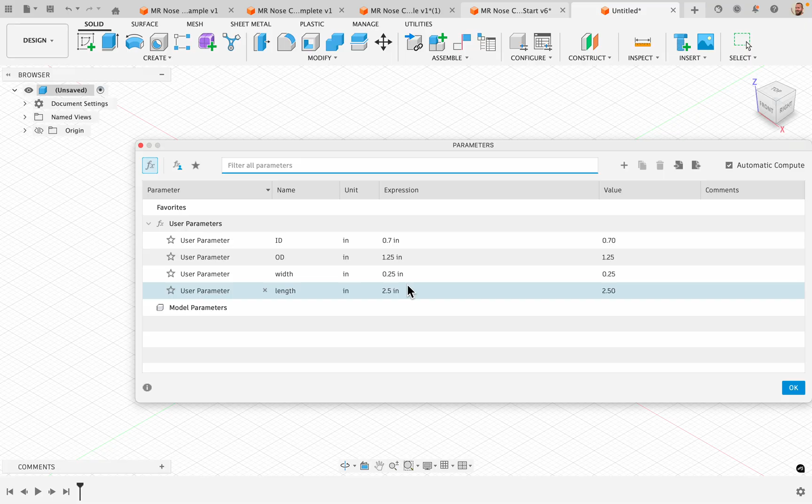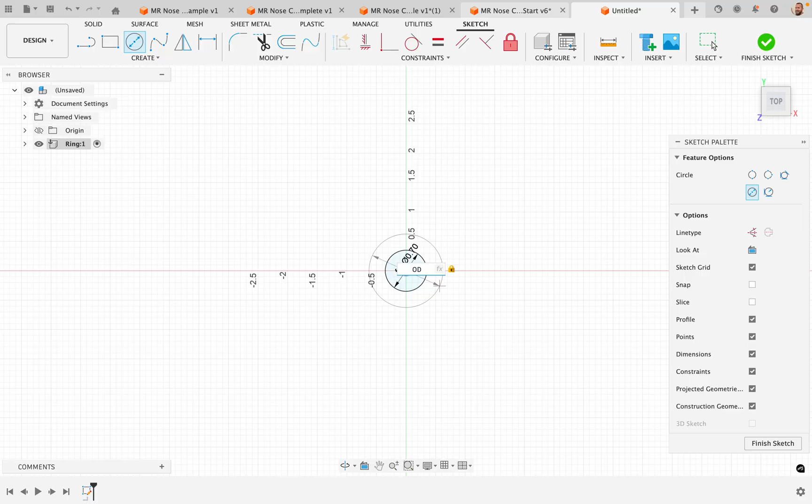Okay, so let's get started. We're going to create a new component, and I'm just going to call this ring. And I'm going to make a sketch on the XY plane. I'm going to make one circle, and this is going to have a diameter of ID for inside diameter. And then I'm going to make another circle, which has a diameter of OD. And I like to drag these out so that it cleans up my sketch a little bit.

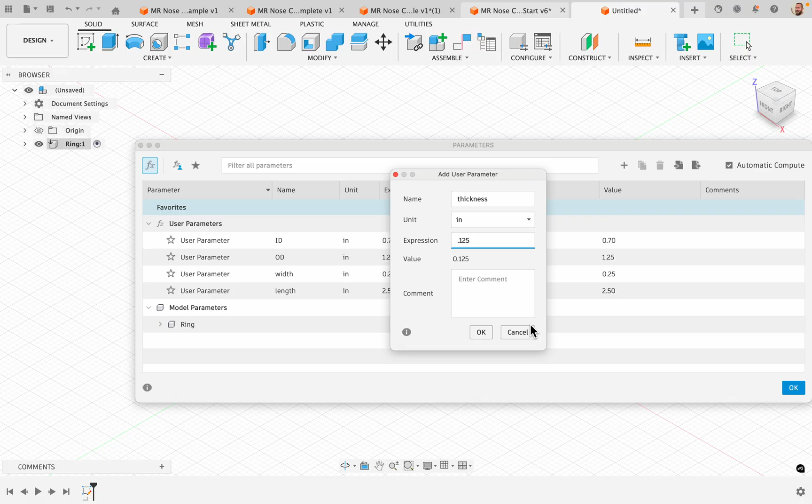Finish. Okay, one thing I forgot, I'm going to add another parameter. That's going to be thickness, and that's going to be 1/8 of an inch because that's the plywood that we're using. So I'm going to add thickness, and I'm going to extrude this to be thickness. All right, great. Now I want to add some little notches in here so that I can put my spacers in there.

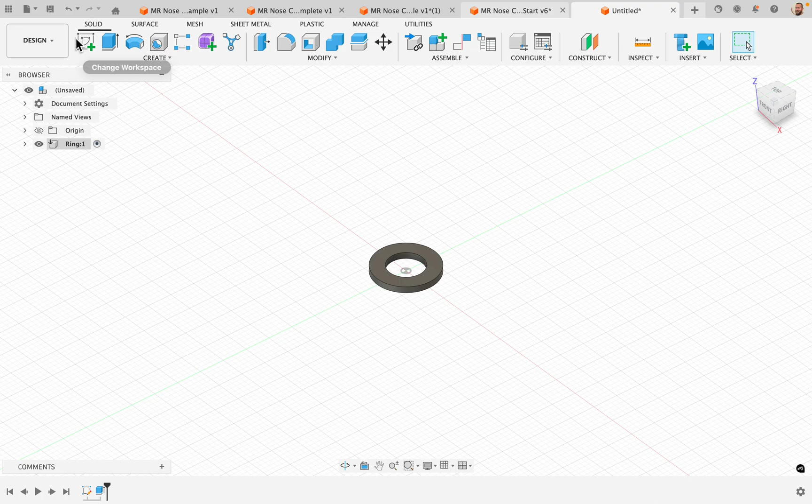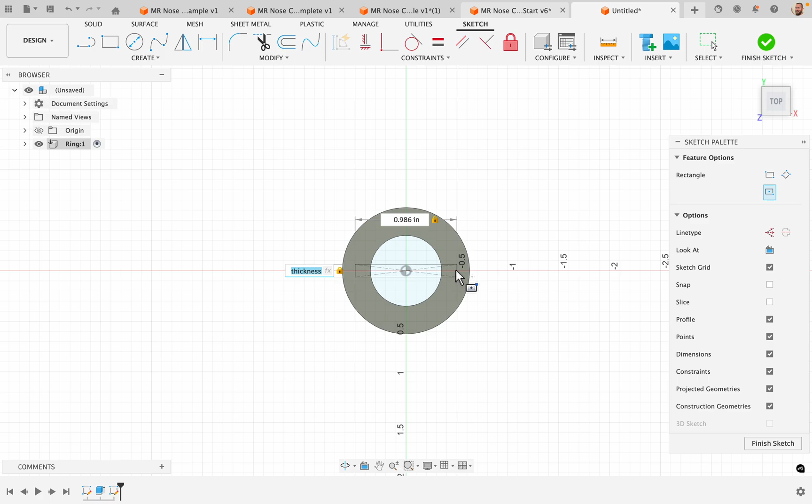And what I'm going to do is make a new sketch. I'm going to click, and I'm going to make a center rectangle. And I'm going to make this thickness. And I'm going to make this, I'm just going to make it this value for now. Let me check that value. I'm going to dimension it here. And this will be

OD minus ID. And I'm going to divide this number by 2, so I'm going to put this around with parentheses. I'm just moving by pressing the arrow key. And now what I need to do is say plus ID, and I'm going to hit enter. And that's good. So this is now in the midpoint between the inside diameter and the outside diameter. All right, so I like this.

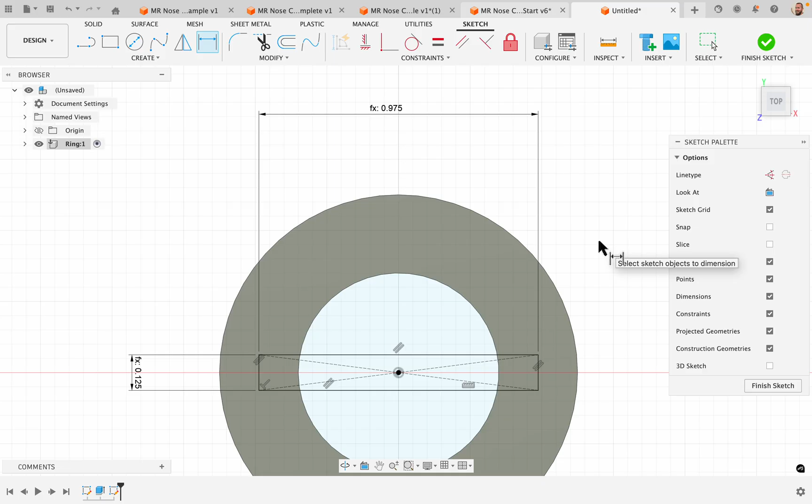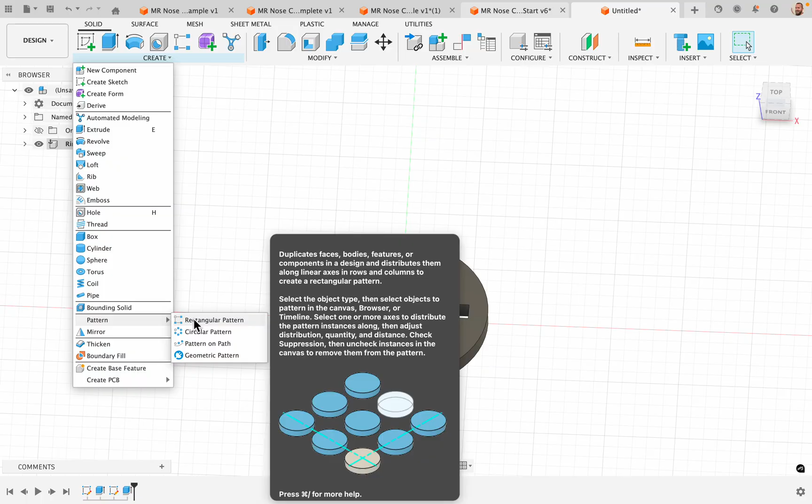And now I think just having three spacers is enough. So I'm only going to extrude one side right here and say okay. And I'm now going to create a circular pattern. I'm just going to click on this feature right here. I'm going to hit components, and I'm going to click here. It's not doing what I want it to do. Let me unselect that. Sorry, I'm going to select features. That's what I want. Features, because I just want to select this extrude. There we go. So features, not component.

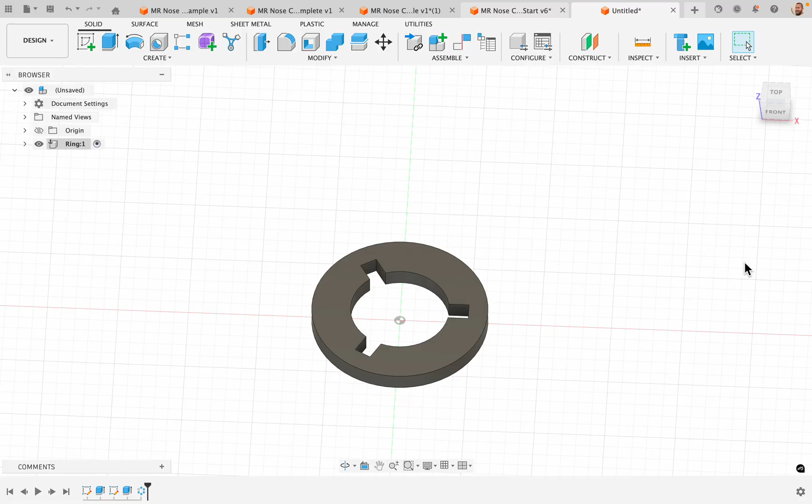Now I'm going to click on my axis. I'm just going to click on this ring, and it's going to set it to 3 as the default. And so I'm going to say OK. All right, so that's going to be one of my rings. And now I'm going to make a copy of this ring. Actually, it's a good time to save. I'm going to save this as motor mount. All right.

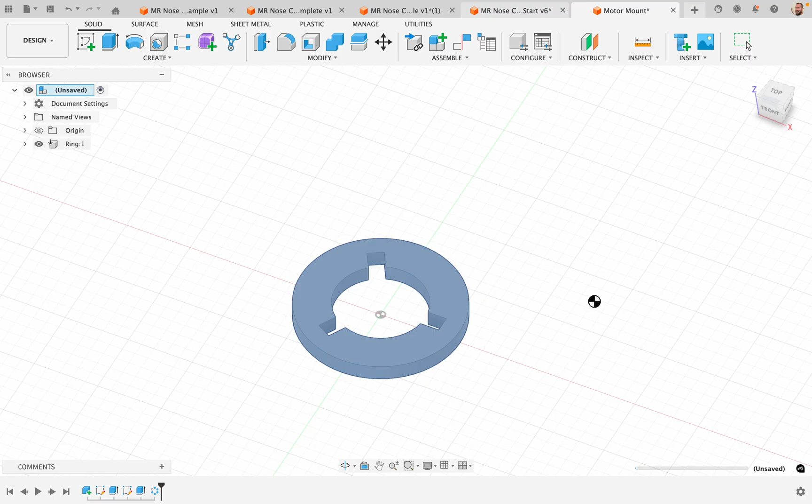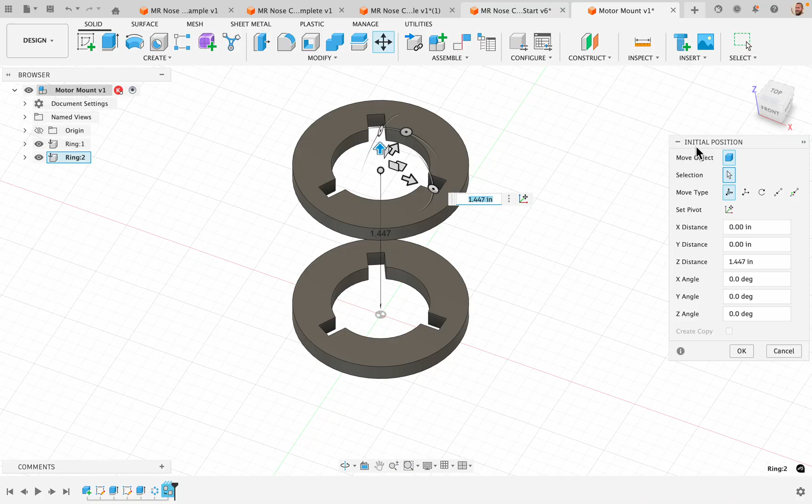And we'll make a copy of this. I'm going to right click, copy, and I do want to keep this as a paste, not paste new, because if I make any changes, I want them to be identical. So I'm going to hit paste, and now I have my second ring, and I'm just going to bring this up as length, right? That 2.5 inches that I have. Beautiful.

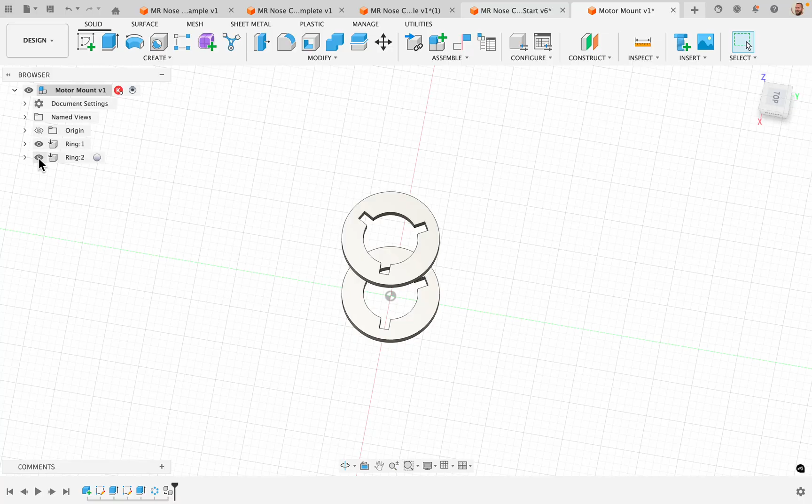Okay, so now we are going to work right here. I might hide this one, and I'm going to make a new component. No, I clicked the wrong thing. I'm going to click new component, and it's going to be called spacer.

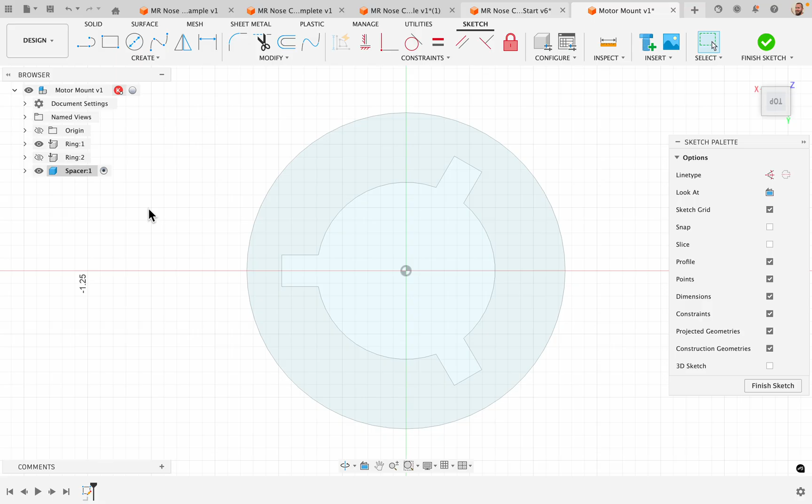Okay, and I will make a sketch on here. I'm going to use this one because it's nice and square with my x-axis. I'm going to project this and say OK. I will make a center point rectangle, and I'm going to start that just from right here.

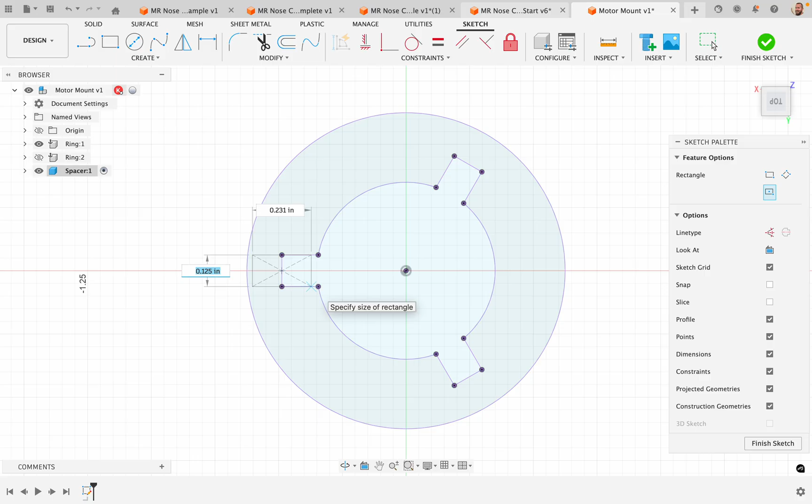All right, so I'm going to try to make this, I do want to make it that thickness on this dimension. And this one, I'm going to go OD minus ID. And I think I need to divide it by 2. So I'm going to put a parenthesis there, and I'm just moving with the arrow key and divide it by 2. So that looks pretty good. All right.

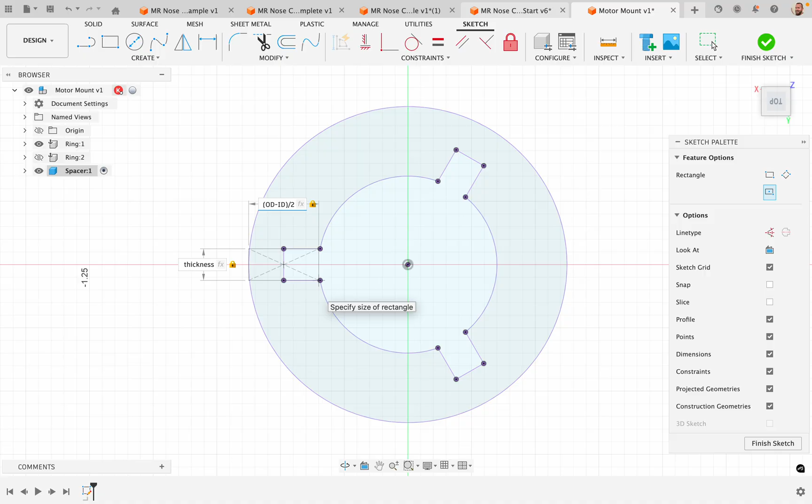I'm going to zoom in and make sure that I like this. Okay, I don't like it because see how that line, the rectangle goes outside of that curve? That's no good. So I'm just going to minus 0.05, and that was too much, so 0.01. That looks good. I like this. Okay, we're going to go with this. So I'm going to finish this sketch.

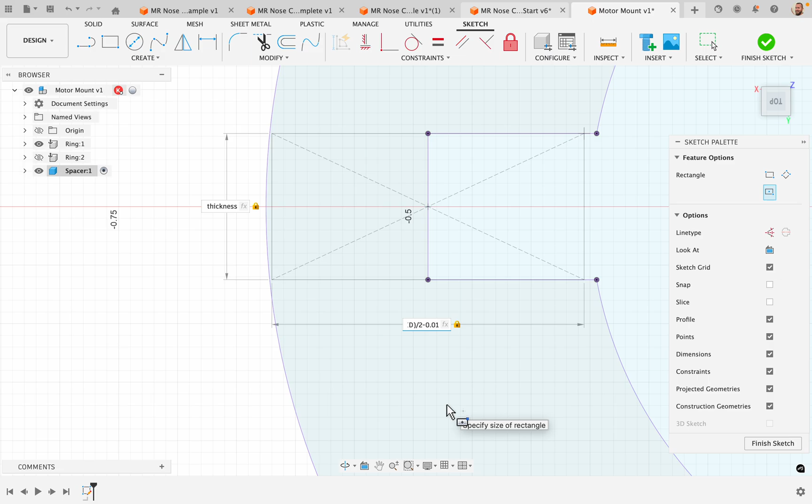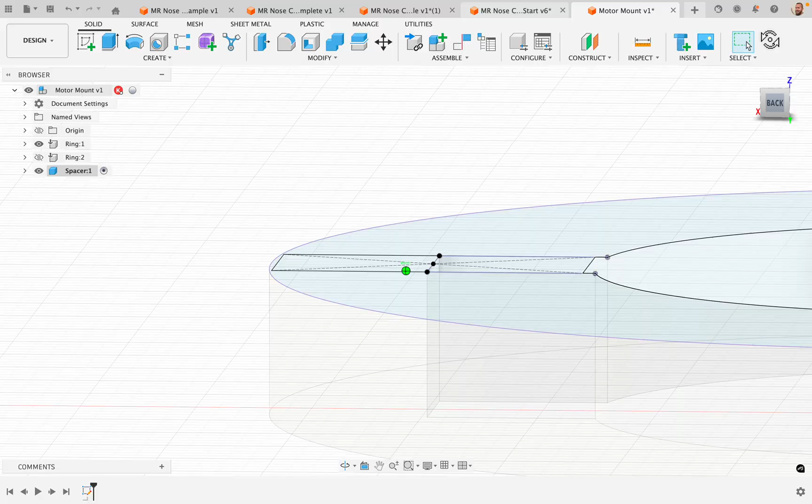Actually, I want to add one more thing. So I'm going to edit this sketch. No. And I'm going to make a line between here and here. And I'm going to use that for extruding. Okay. So now I'm going to extrude this part down. And I'm going to extrude it down just a negative thickness. I'm going to say okay.

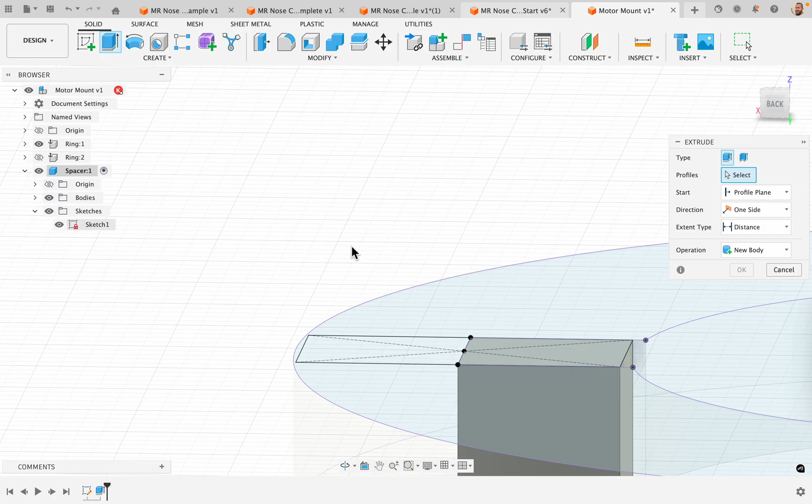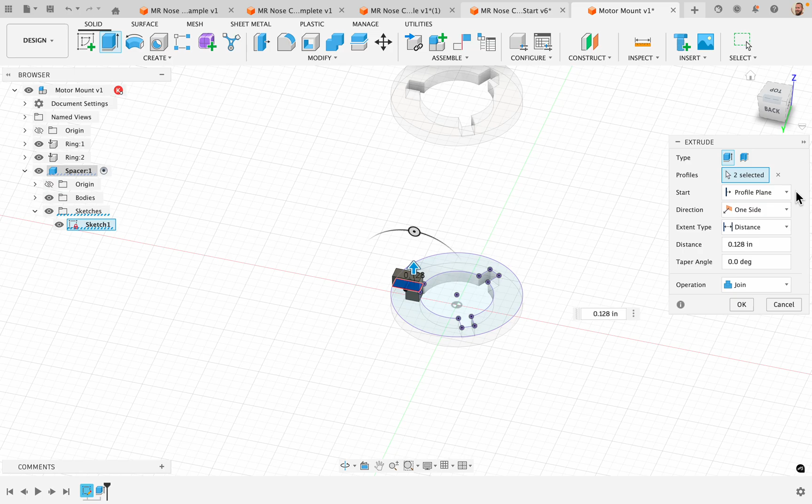And remember, when you extrude, your sketches disappear. So unhide your sketch. And now let's extrude this and this, and we're going to extrude it upward, and it's going to be joined. That's what I want. And I'm going to now show my second ring. And I'm going to click To Object.

All right, and with that second one showing, I'm going to go up, and I'm going to click on the under surface, and it's going to extrude all the way up to that top, to the bottom of that second ring. All right, this is looking great. We're almost there.

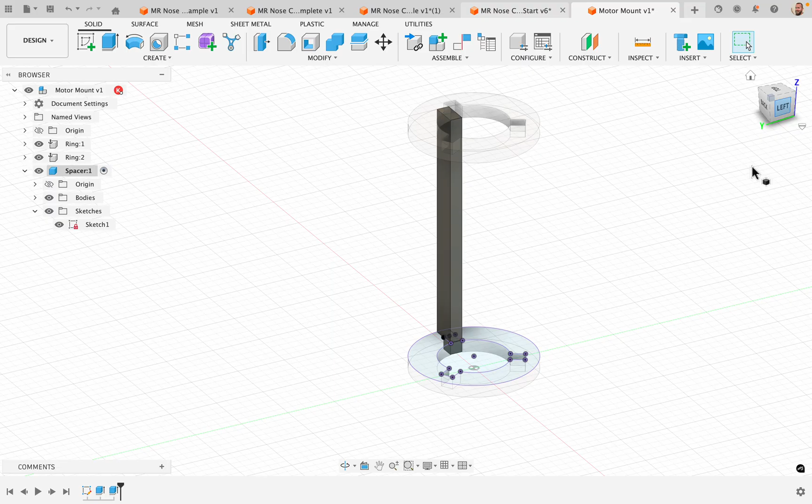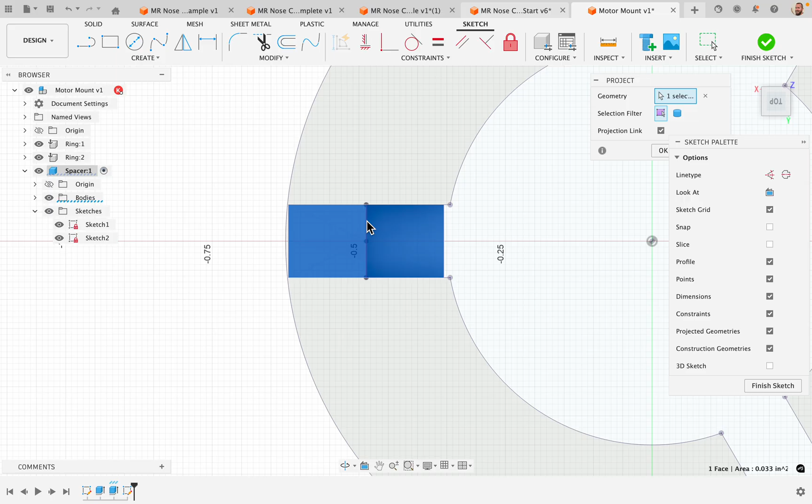So now I'm going to make a new sketch. And that sketch is going to be on this surface right here. And I'm going to project. Let me zoom in so you guys can see a little bit better. I'm going to project this, and I'm going to say OK. I'm going to make a line that goes straight across here.

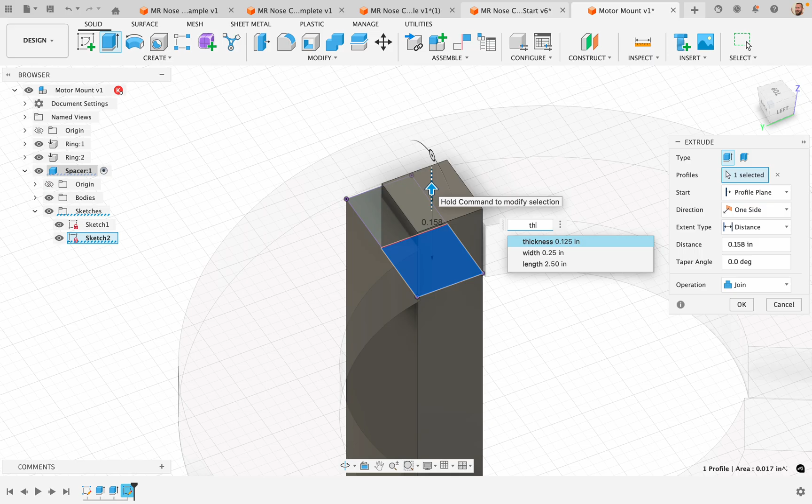Here, and here. I'm going to finish that sketch, and I'm going to extrude just this right here. Just this. All right, and I'm going to extrude this to be thickness. Okay, cool. So let me zoom out. So I have one of the spacers that I'm going to use. And now, guess what? I want to do a circular pattern.

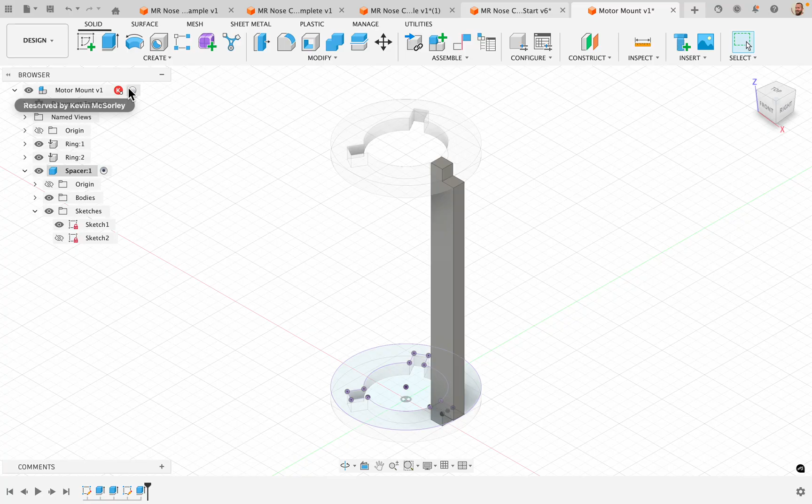So I want to create a circular pattern. Before I do that, sorry, I should have said I want to go back and I want to activate my design, because I want these to be spacer 1, spacer 2, spacer 3. I want them to be separate components. Okay, so create circular pattern. It says features from my last pattern. I'm gonna change this to components and select it.

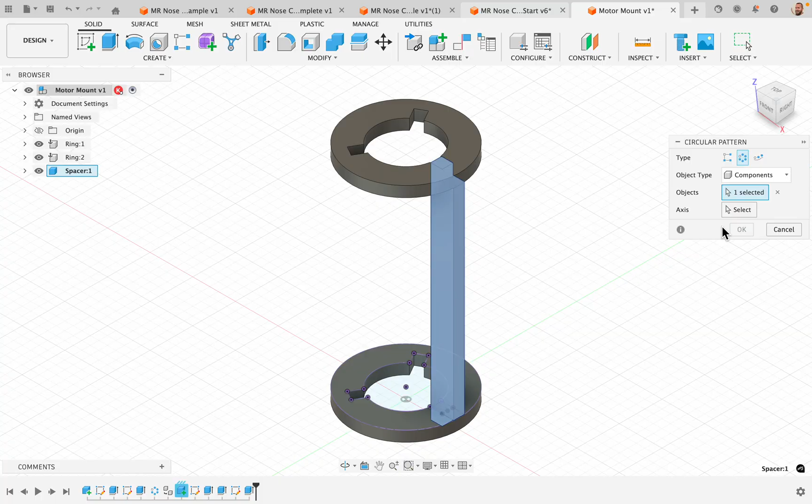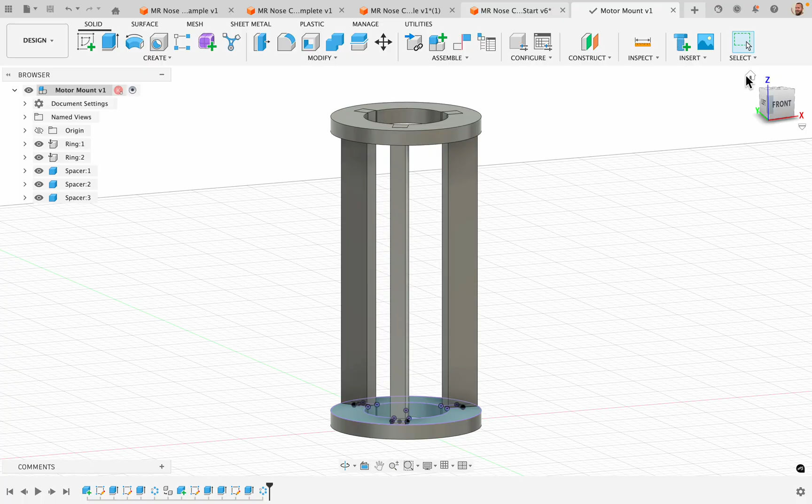My axis, I'm gonna select right there, and 1, 2, 3, and I'm gonna hit OK. All right, there we go. So this is gonna be the spacer that I'm gonna use for my, oh no, what is that? Sorry. That's the motor mount that I'm going to use for my rocket.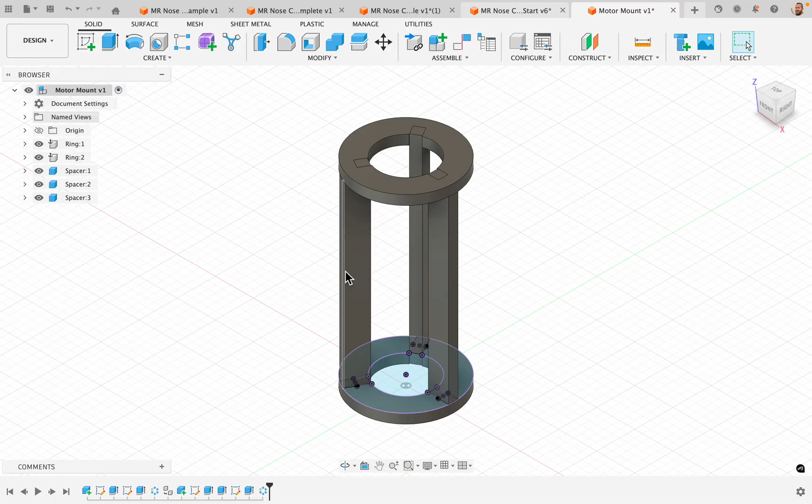All right, you're going to have the 0.7 inside diameter right here. Your fuselage is going to dictate your outside diameter, but this spacing distance, that 2.5 that I used, should also work for you. All right, thanks for watching.